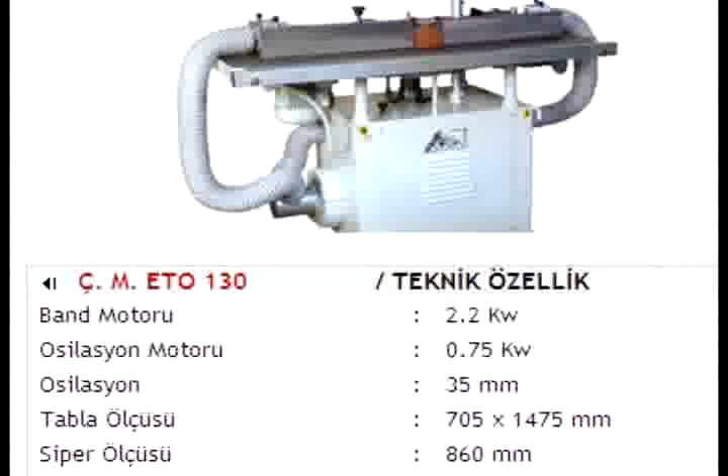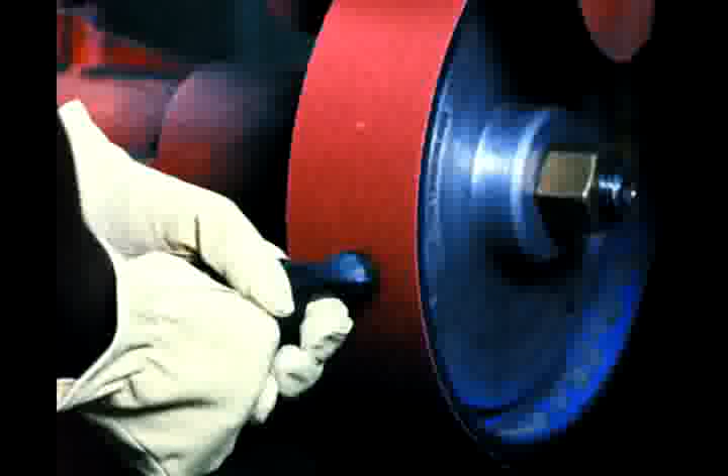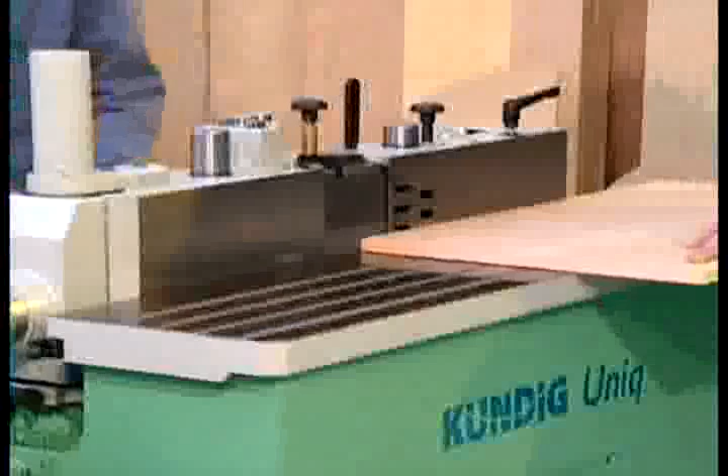Suitable Kundig Uniq Edge Sander. One can sand vertical and oblique, solid and veneered edges. Your work becomes easier. The precision cast work tables offer a constant work level and maximum stability. This is true for both sides, your needs, and which makes the perfect execution of your work easier.

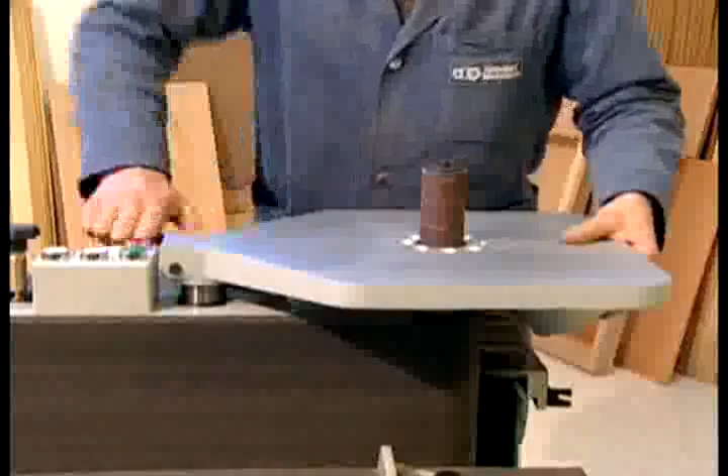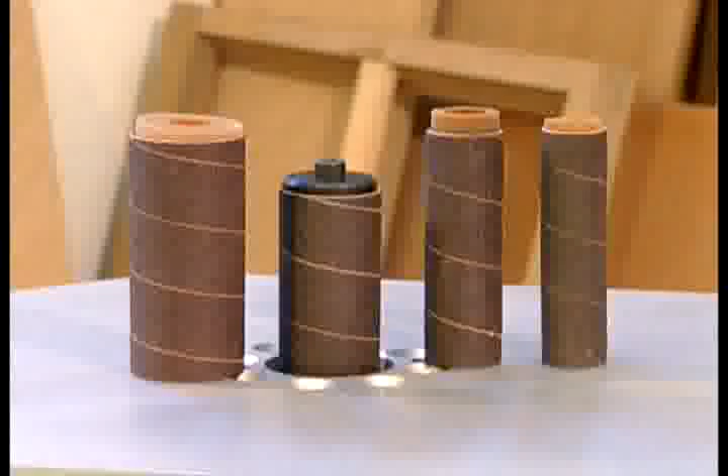As an option, the Kundig Uniq may be equipped with an extra table for the sanding of curves. The Uniq can be used as an oscillating spindle sander by adding the option of spindles and removable table to sand internal and external shapes. With an optional table, the large drive roller can be used to sand larger diameter curves.

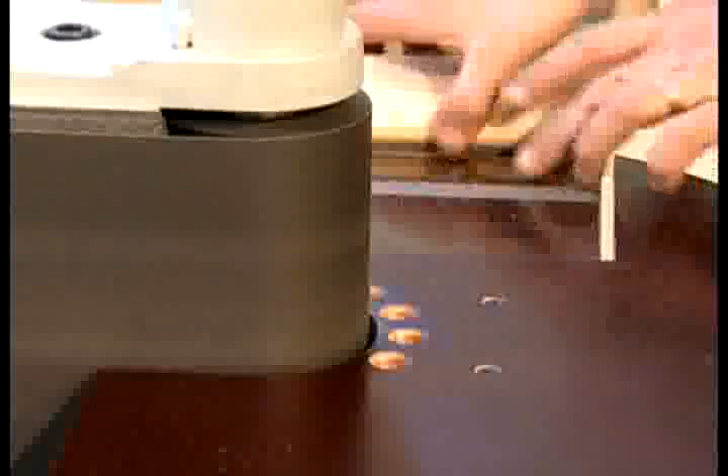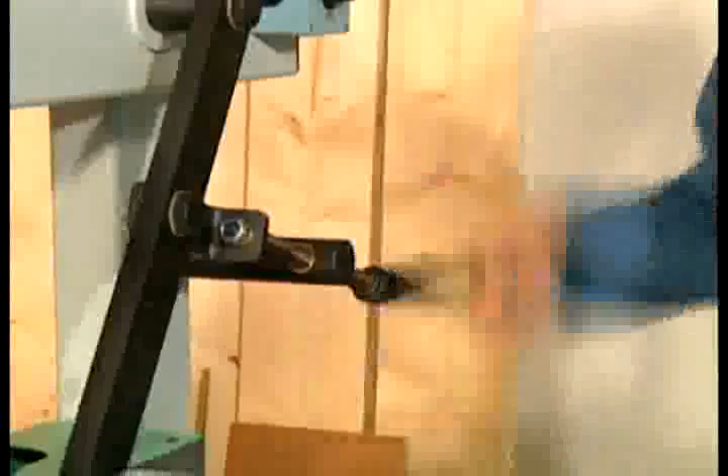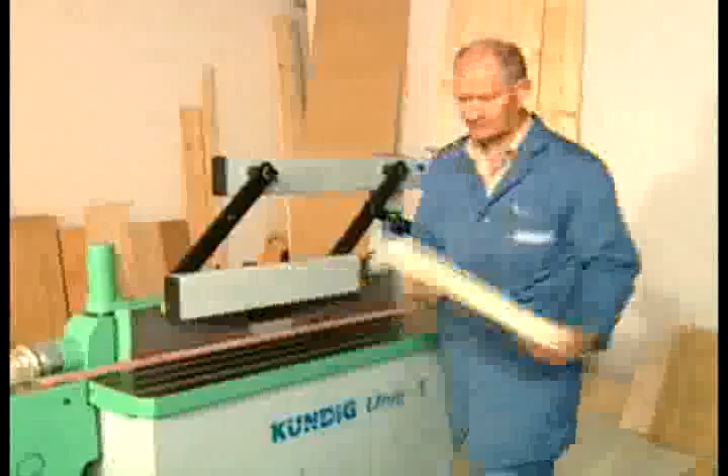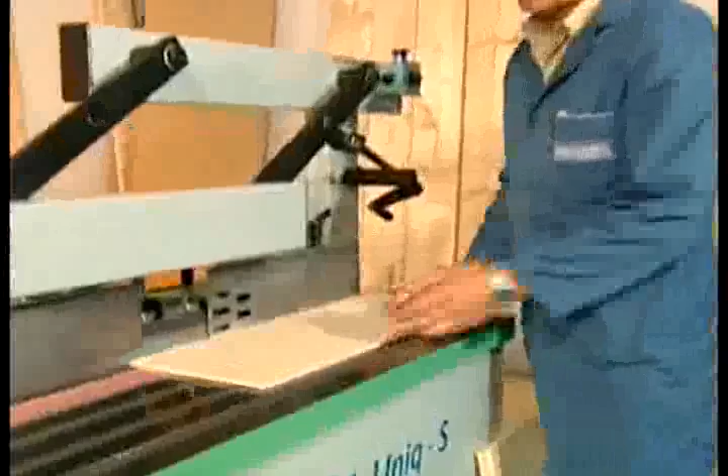For big work pieces, a sliding table extension is available. Single pieces may also be sanded manually. As a useful option for series work, the variable adjustment of the oscillation stroke is recommended. It can be adjusted exactly to the workpiece thickness so that the complete sanding belt can be used more efficiently.

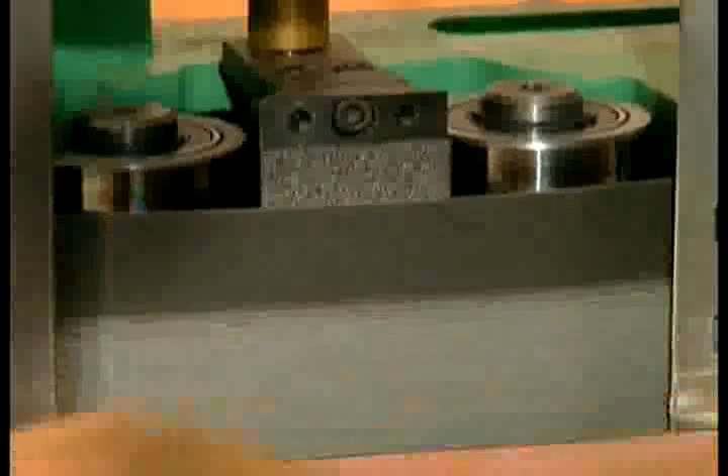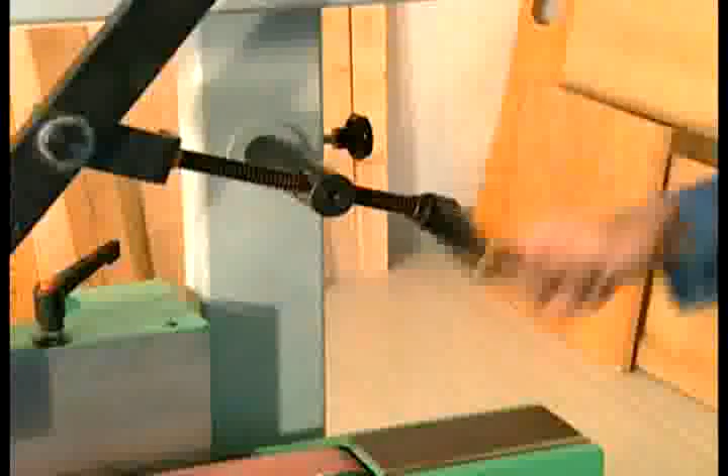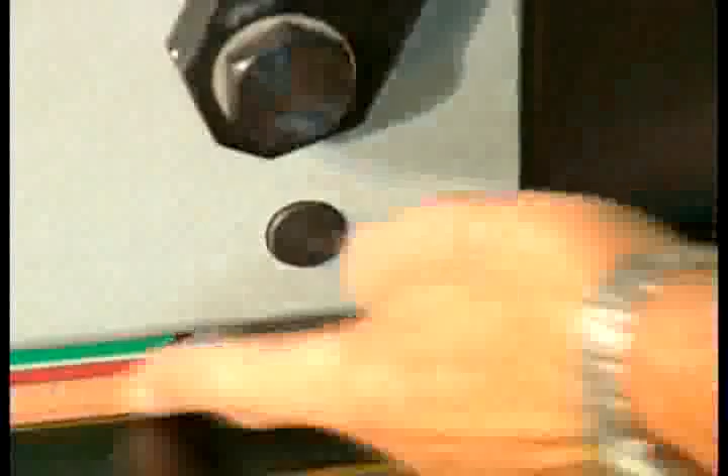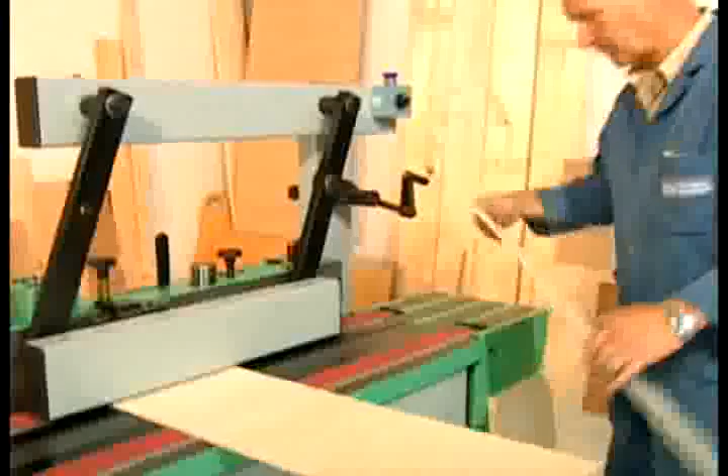Additional equipment is available for special workpiece dimensions. For example, the guide fence for the treatment of long workpieces. The top-mounted feed belt is mainly used for series production of very short workpieces. For the cross-sanding of narrow workpieces, a configuration with a second parallel feed belt is recommended.

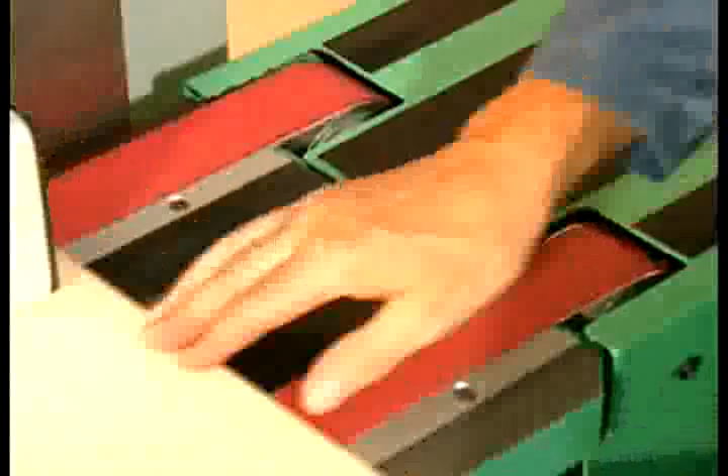The Kundig Unique S Edge Sanding Machine. Incredibly versatile. Incredibly efficient. The Kundig Unique S. Simply perfect. Kundig. This is how sanding can be a real pleasure.

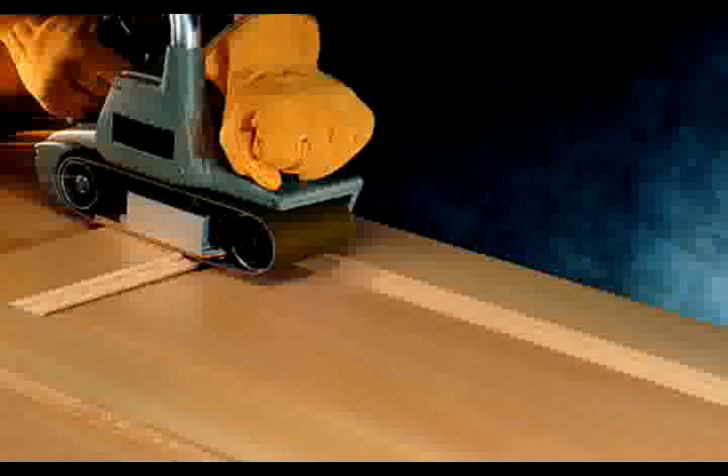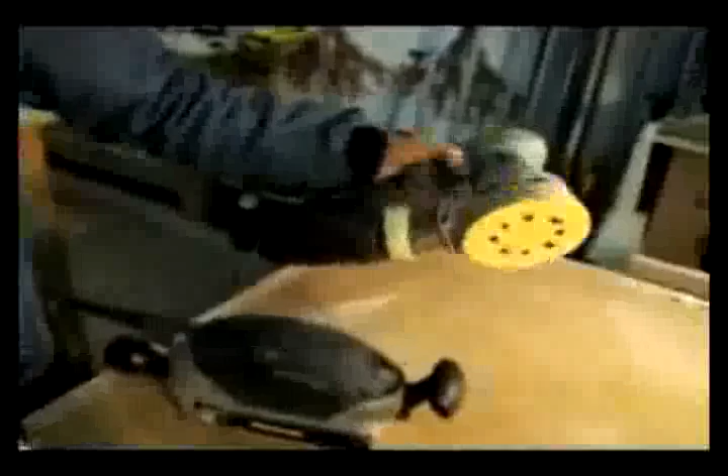We have a bigger belt sander here, and then we have a little bit smaller one. They essentially perform the same task, but this is for use on bigger things such as tabletops and things like that. And this would be a little more that you could get inside a cabinet, do some light shaping. It's a little more versatile. It allows you to get into some small areas that you can't get this much larger sander into. And then this is the random orbital sander, which is pretty much just a cleanup tool for the work that the previous two sanders have done.

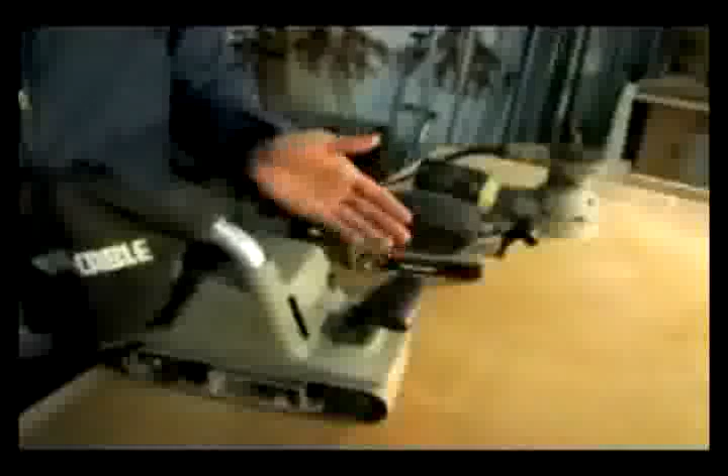These belt sanders are going to be generally used with heavier grits. You can start as low as 36 if you're trying to shape something, and then you go up into the higher grits, 50, 80, 100, 120, which is really when you begin to smooth things out and achieve a real finished piece look. And then that's when you come in with the random orbital sander to take out some of these heavier machine marks that the belt sander leaves. And then from there, you're going to go to hand sanding for a truly smooth finished surface that's going to be ready for finishing.

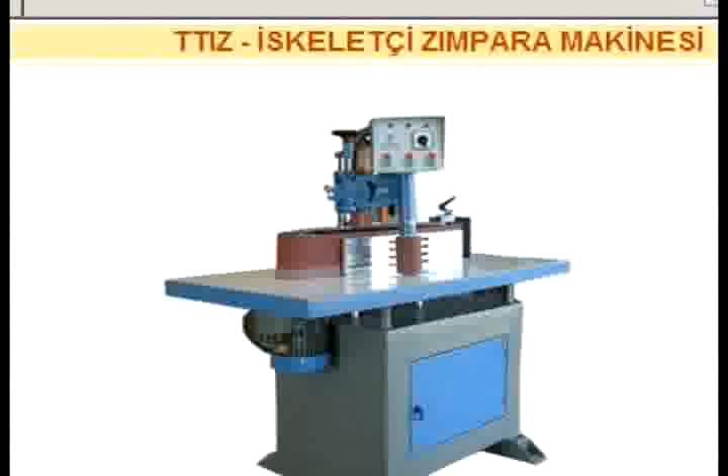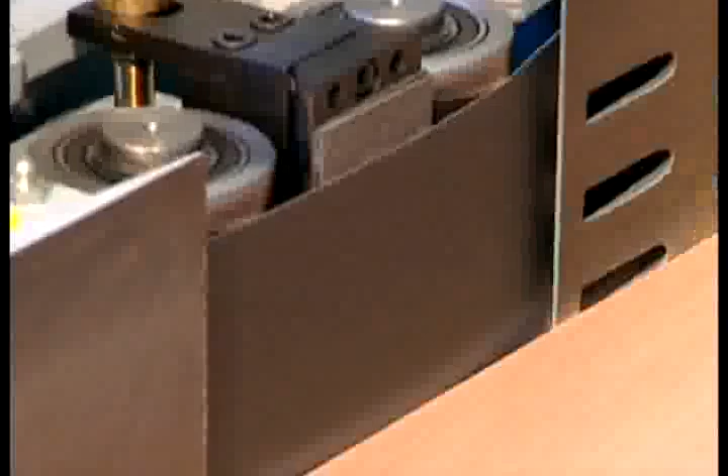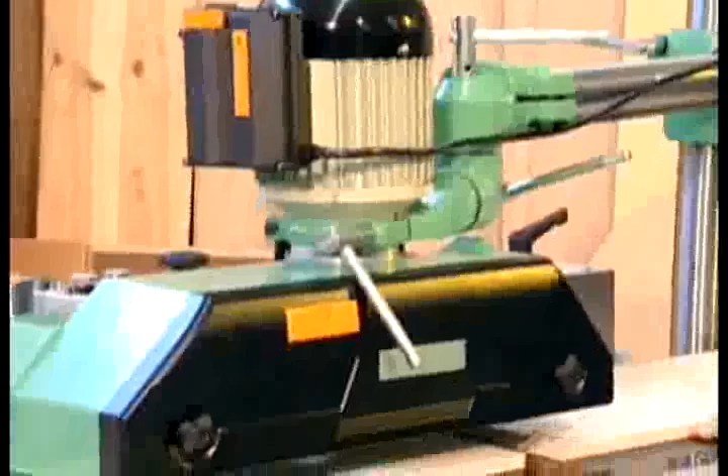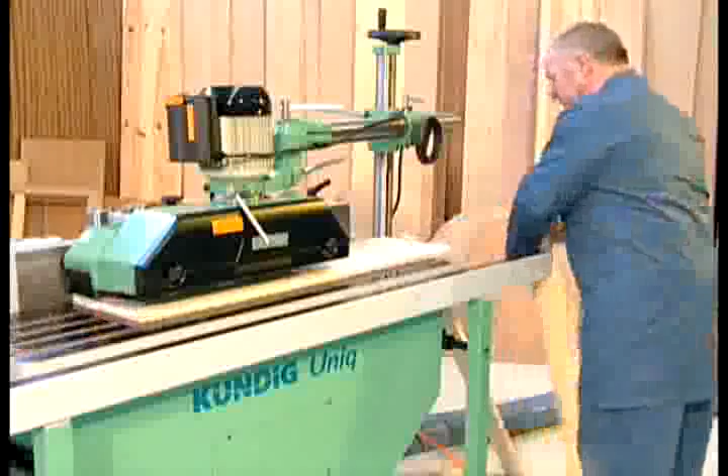On one side, solid wood processing is done. On the other, the through-feed sanding side. The adjustable inlet fence permits veneered edges to be sanded as well, without any risk. Tremendous productivity increases are achieved by using the optional power feed support and power feeder. Despite its compact, space-saving construction, the Uniq is excellent for planing or jointing long workpieces.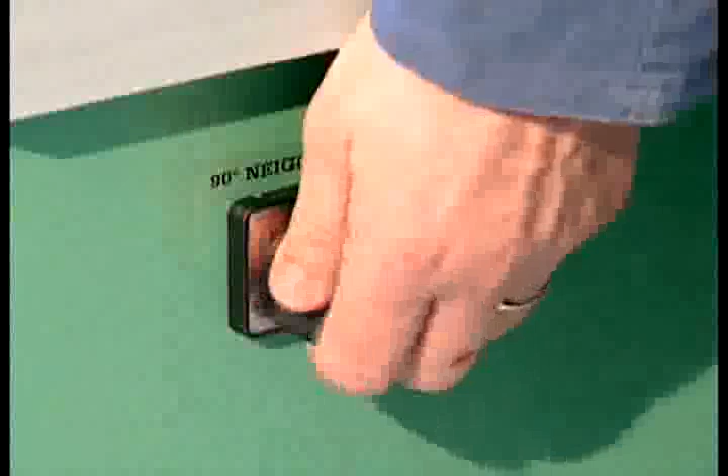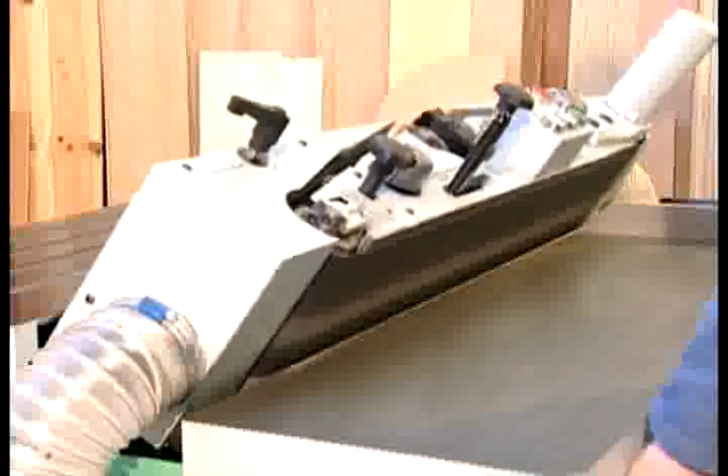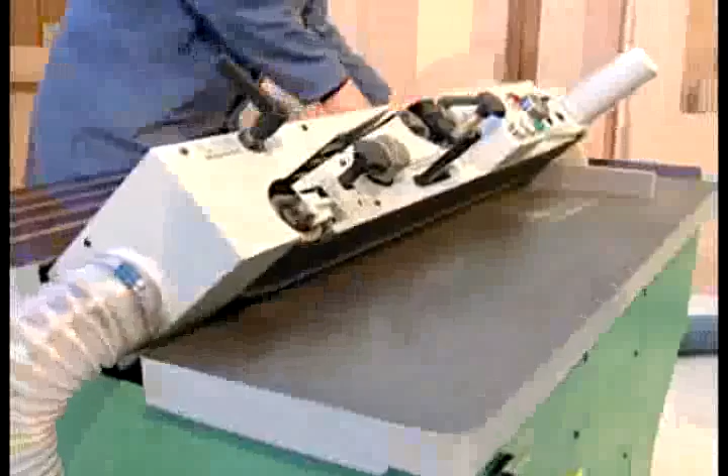The patented construction of the Kundig Unique edge sanding machines permits sanding beveled edges simply by touching a button and with no other changes. The sanding unit can easily be tilted by motor up to 45 degrees. Also, with the tilted abrasive belt, sanding can be done from both sides without any change or long adjusting times. Compound angles can be produced. Miters are no problem.

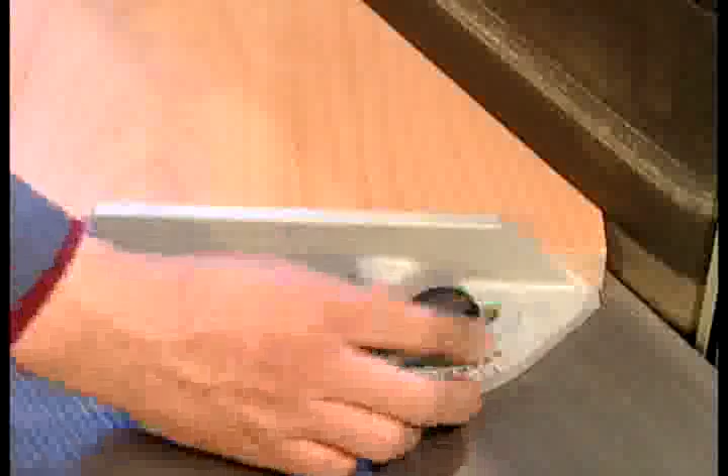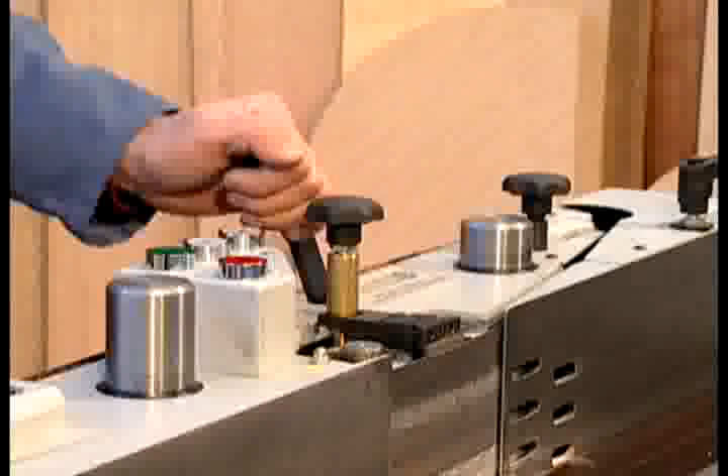The incorporated oscillation of the whole sanding unit guarantees controlled use of the abrasive belts to ensure long life. For maximum use of the abrasive belt, the sanding unit is adjusted in height by motor. This is how sanding can be a real pleasure. Whether you readjust the sanding pad, correct the belt tracking, or change the abrasive belt, all functions can be carried out in a few simple steps. Only the Kundig Unique is so solidly engineered and operator-friendly.

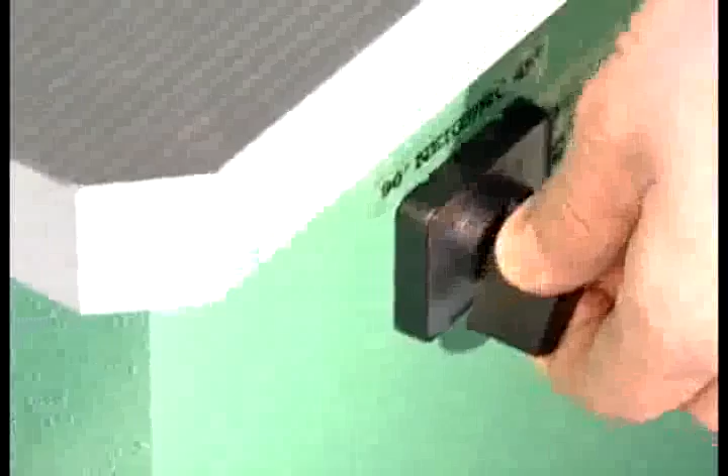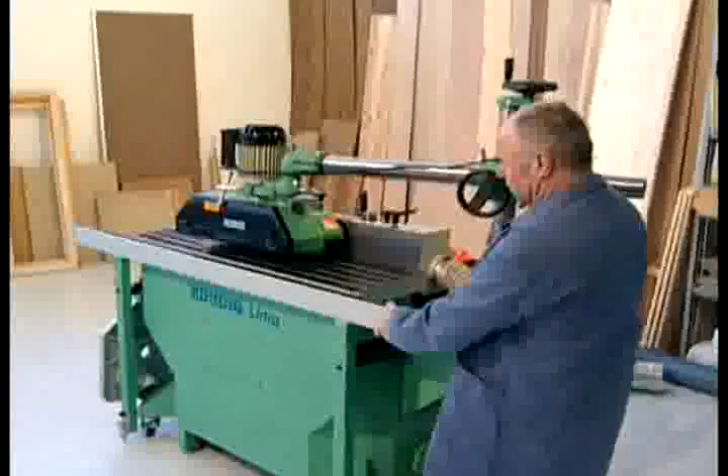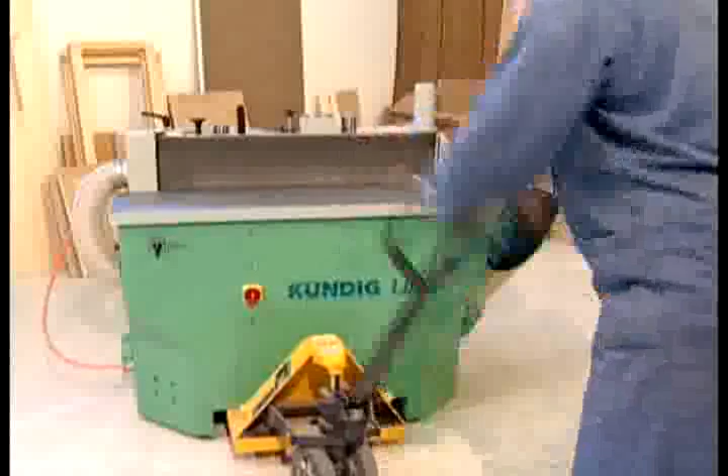This machine becomes more accurate by replacing the pointer and scale with the choice of an optional digital angle display for the tilting of the sanding unit. If mobility is needed, the Unique is available with an optional wheel kit. But already in its standard form, the Unique is easy to move using a pallet truck. An opening at the bottom of the frame makes this possible. The successful Kundig Unique is already unequaled in versatility and in its extraordinary profitability.

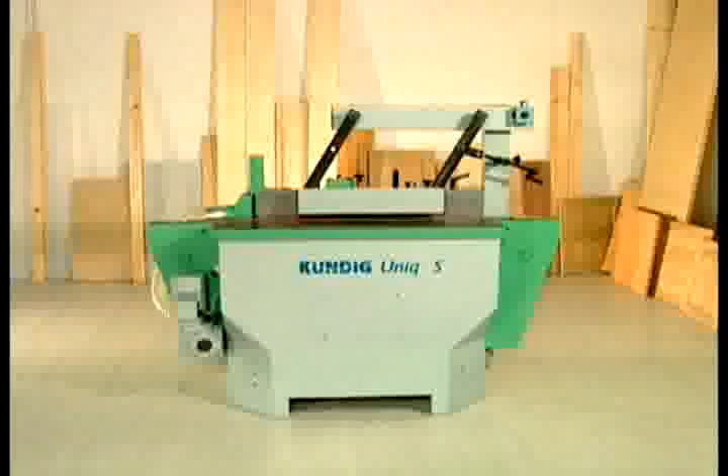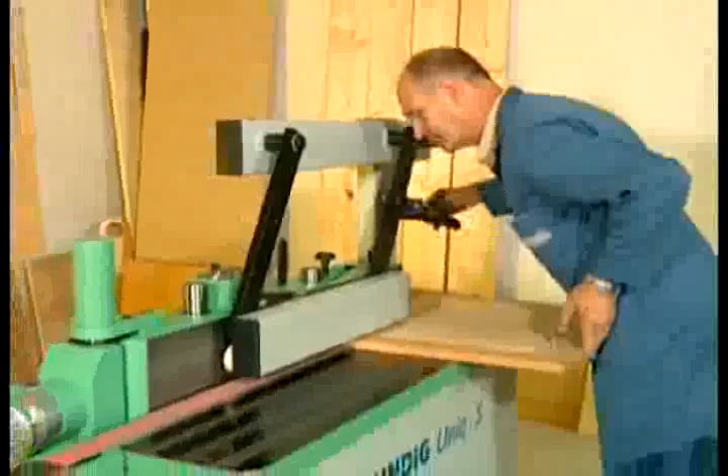The Kundig Uniq S Edge Sander proves that even top performances can still be improved. The integrated feed system makes work even more efficient and more convenient. The advantages of the feed belt system compared with the traditional power feeder are obvious: quicker adjustment with fewer problems. No sliding on the work table or under the pressure rollers. No scratching of the underside of the workpieces. Brilliantly simple. The Kundig Uniq S.

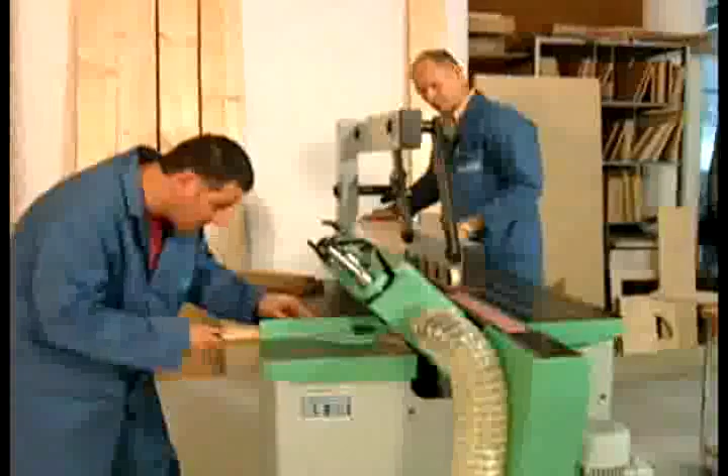The workpieces are placed on the feed belt against the in-feed fence. Top-mounted pressure rollers grip the workpieces and guide them to the sanding belt where they are perfectly sanded. Of course, with variable feed speed. And obviously, all that goes for the tilted sanding unit too. The two-sided use of the machine is always guaranteed, as well as all further devices and options of the Kundig Uniq Standard Model.